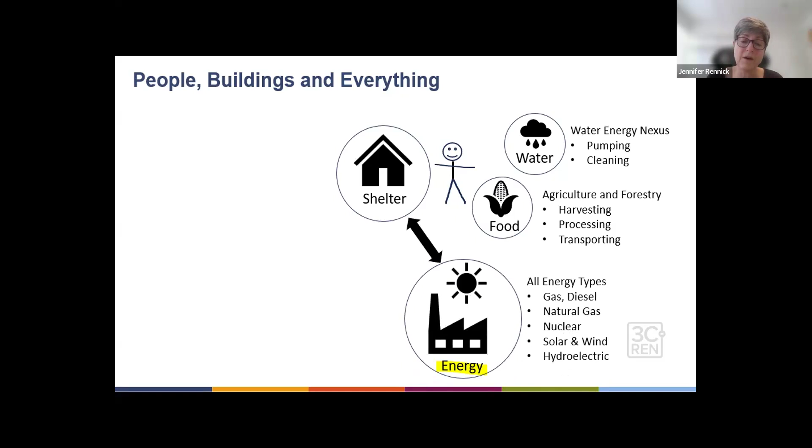And so when we talk about energy in general, you might see an icon like this that looks like a power plant, but really it could be natural gas, it could be nuclear, it could be solar and wind, hydroelectric, gas, diesel. All types of energy are a part of our environment. And it's how we power our buildings.

And then, of course, how we move ourselves and our products and how we transport all these materials is all categorized under transportation. And by shelter, really what we're going to talk about is buildings, all kinds of buildings, and their operational and embodied carbon impact.

So that includes the electricity that is used to power up those buildings, the natural gas that's perhaps burned directly for those buildings, the refrigerants that are involved in all the heat pump technology we're going to be talking about, or air conditioning, and other industrial processes that require refrigerants, and of course the building materials and the manufacturing themselves, which is part of the embodied carbon impacts.

Okay, so that kind of sets the stage, because really when it comes to our buildings, they are a piece in this giant thing we call civilization, which is, in my mind, it's like everything. And then that civilization is in the earth and in the world, which encompasses the rest of the everything.

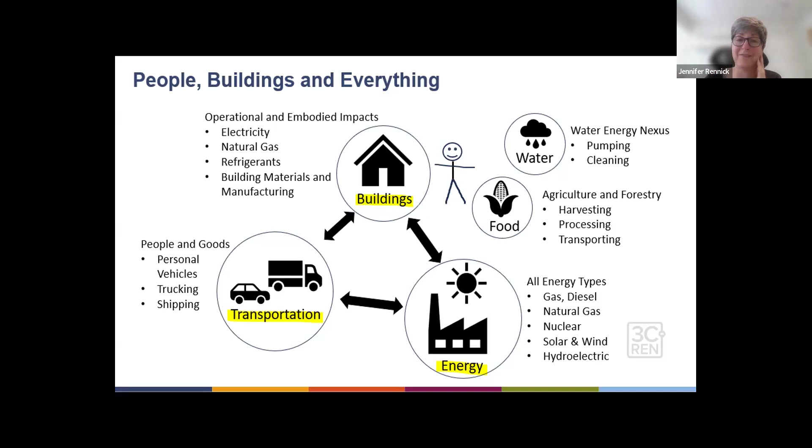Now, when it comes to tackling kind of the problem-solving process for reducing greenhouse gas emissions, first, very intelligent folks, scientists, and many policy people and government officials, they're looking at what is this problem that we're noticing where we have extreme climate weather events, climate change, global warming, an ocean that is absorbing CO2 and becoming more and more acidic.

And maybe years ago, some of you might remember in the East Coast where acid rain was really a big deal and started a lot of people thinking about this. So we identify a problem, then we have to identify causes, and it boiled down to greenhouse gas emissions, and 7 of them is kind of the main ones that we started to look at.

And then as a society, we started to identify those sources and the scope by looking at chemical processes, different economic sectors, looking at our activities, where we do those activities, and what societal groups are being impacted by them. And so as a collective group of problem solvers and policy people, we have to identify the aim. What are we going to do about this?

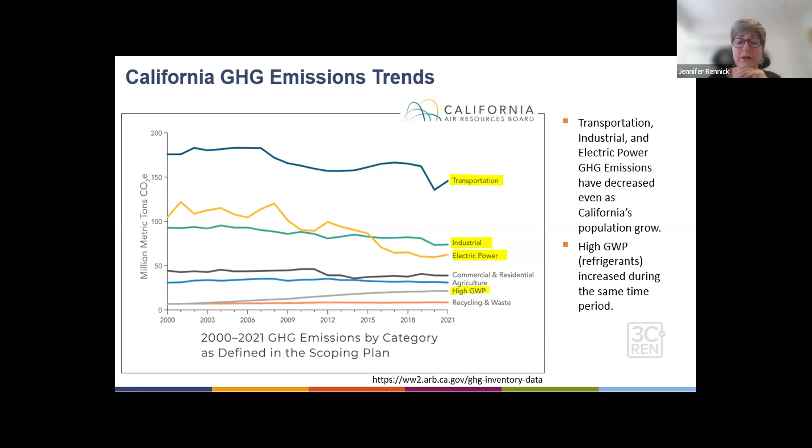High GWP, high global warming potential, often refers to refrigerants. So our refrigerant use in the state is increasing, although these other items are trending downward. Later on, when we talk about appliances and heating and cooling systems that use refrigerants, we'll specifically address what California and the rest of the country is doing on that.

Now, when we take those categories and look at subcategories, and how that's divvied out to make up the scoping plan for how we tackle greenhouse gas emissions in California, we can break them out with electricity, commercial and residential together, agriculture, that high GWP category, waste, transportation, and our industrial sector. And each of those could be subdivided further.

But when we think about architecture and architects, planners, engineers, the building and construction trade, we realize it cuts across many of these sectors. Altogether in California, our buildings and construction account for approximately 25% of California's greenhouse gas emissions. And the impact is likely much larger when we take a look at all these sectors,

because a lot of our materials are made out of state and they're imported, and that has an embodied carbon impact and a transportation impact that might not be reflected in this. So Project 2030, for example, estimates that buildings and construction account for 42% of global greenhouse gas emissions. And we also need to include the portion of electricity that then powers our buildings.

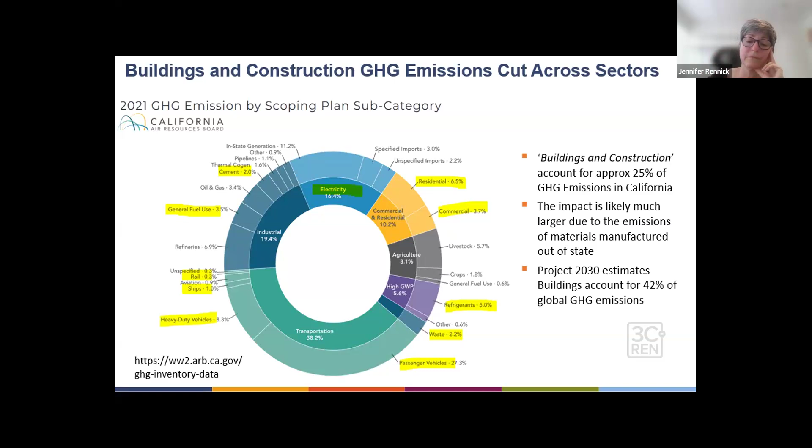Before we move on to zero net carbon design in the electric grid, I'm happy to field any questions that come along, put them in the chat, and Andy will ping me. I think the main point of what we just looked at is that buildings and construction play a role in greenhouse gas emissions, which in turn play a role in climate warming, hence California's push to educate architects on the impact of our design and how we can move towards zero net carbon design in California.

One thing we may want to clarify is that when we talk about natural gas, about 95% of what is burned within natural gas is methane directly. So there's the burning of the natural gas, the methane, but there's also the leaks that happen within the movement of the natural gas. I'm wondering if that's part of what shows up in the GWP, the leaking of methane, which is so much more impactful as a powerful greenhouse gas. Am I summarizing that correctly?

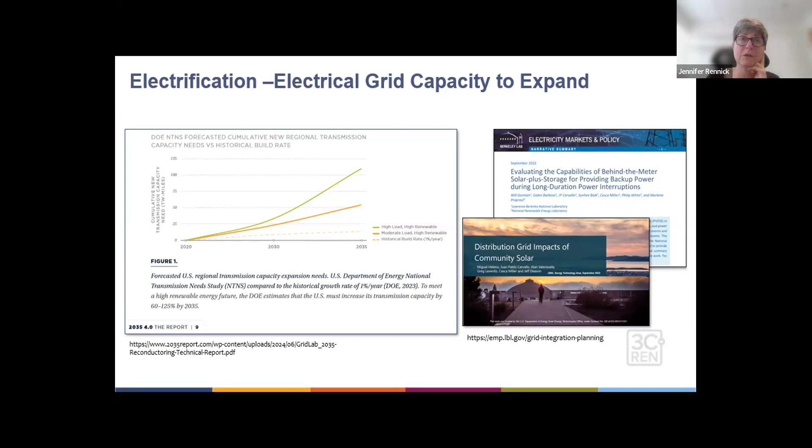What's the impact when a lot of our buildings, by energy code, Title 24, are required to have PV panels plus battery for many commercial projects - now a new 2022 energy code requirement. So yeah, the grid needs to expand.

In California, we're part of a grid system that involves the western states, a bit of Mexico, and two provinces in Canada. In California, we're looking at how California impacts this larger region, and where and how we generate this power.

There's great information on the California Energy Commission website that addresses renewable energy, combined heat and power, nuclear energy, natural gas, geothermal energy, solar energy, etc.

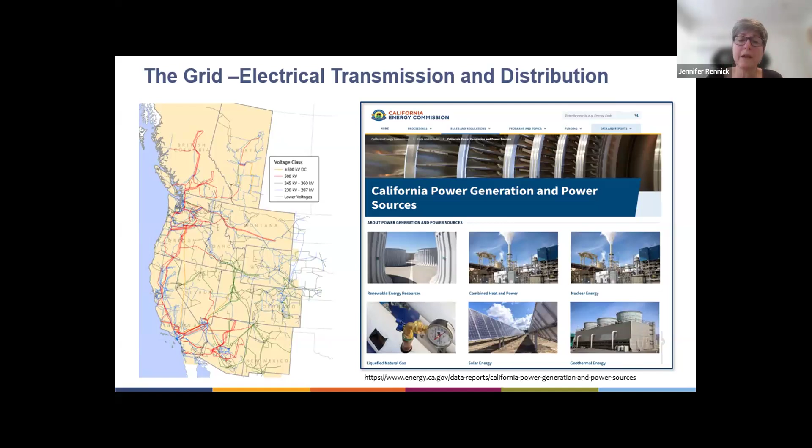In California, when we look at where our electricity comes from, quite a large portion - about a third, 31% - of California's electricity is generated from natural gas, by burning natural gas in generators.

Fortunately for California, we've done really good work on getting more and more renewables. About 69% of our electric energy now comes from non-fossil fuel sources. Our renewables that aren't hydroelectric or nuclear - wind and solar - provide about 38% of the total mix now. So that's the good news.

But there's a reason we're still burning natural gas, and why we're not 100% renewable energy yet. We'll put a pin in that - we'll come back to it in a moment.

Simultaneously, there's a lot of studies and work going on for strategies to meet the increase in energy demand and capacity without necessarily building new transmission lines. There's something called reconductoring - advanced conductors that can be used on transmission lines to increase the efficiency of electricity transmission.

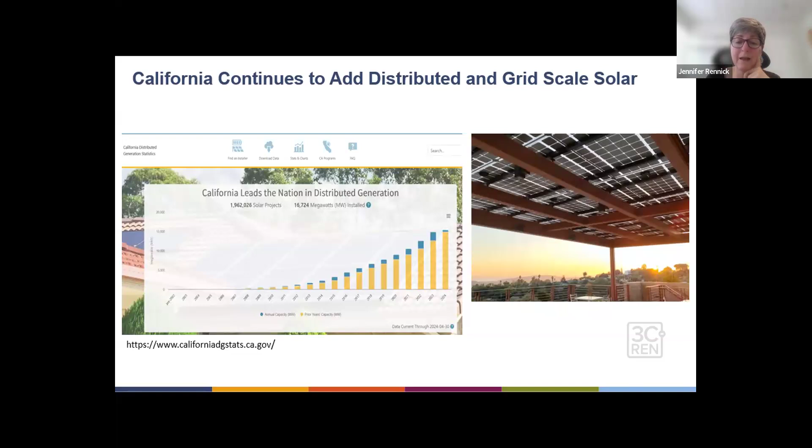The good news is that with all that solar, we're able to meet more and more of California's energy demand. But also, you might have heard people say, oh gosh, we're producing so much solar energy during the middle of the day that we can't use it all - this isn't working, and we need something else to happen.

We don't need more solar, some say. But the state of California, and a lot of folks, would disagree with that. They say yes, we need to continue building up our solar energy and renewable resources, and we're going to find ways to have energy when the sun goes down. Because essentially, when the sun's up you get lots of solar energy, and when the sun goes down, we don't have energy.

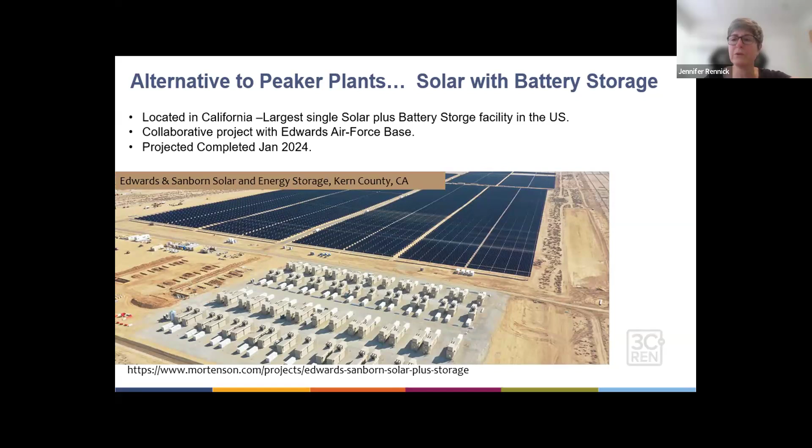And this type of project with the battery storage is what's going to reduce our reliance on the direct burning of natural gas to produce electricity. And along with that, the solar and the battery storage is expected to expand rapidly.

So if you just take a look at our clean energy resources that we had online in 2022, by the time we get up to 2045, you could see by the chart on the left that those energy resources are expected to grow substantially.

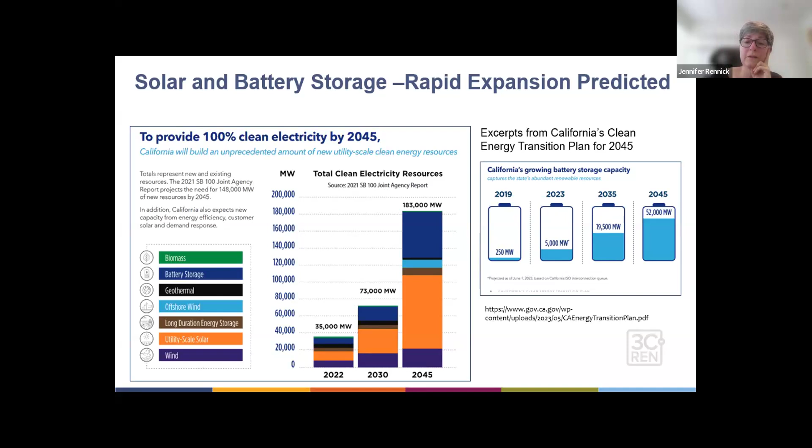And the battery itself, the graph on the right, just shows the battery part of that expansion, to isolate it and give you a visual of the huge amount of increase that we're expecting, tenfold from where we are now, taking the 2023 number, more than tenfold. This is all part of California's clean energy transition plan.

Now we'll kind of put a little pin in that part of it, and we're going to switch to the idea of hydrogen production. And why? Well, because we've got the Department of Energy working on this with their Earthshots program, and they're looking at ways to reduce greenhouse gas emissions quickly.

And one of the ways we can do this is to take that natural gas that we have, and rather than burn it, we can convert it, take the methane and convert it to hydrogen. And making hydrogen from methane can be a clean process because we're able to control that process and take the carbon and sequester it and use it in other ways, rather than just having the methane released, or burning it and having the CO2 and other pollutants be released.

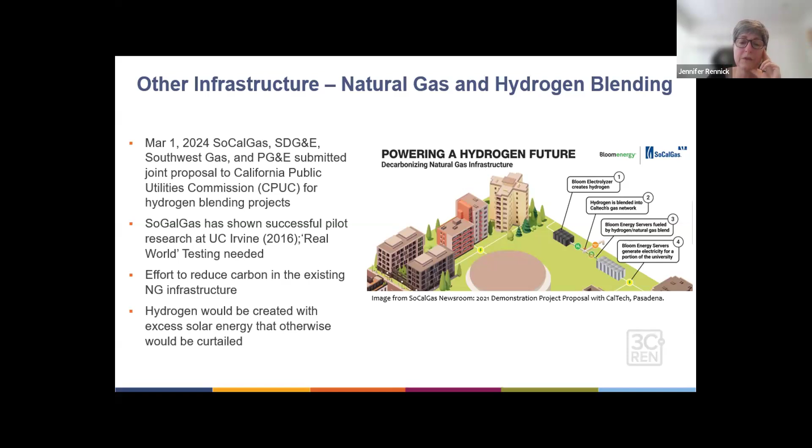Also, in case you didn't hear, this just happened a few days ago. The company Zero Emission Industries used a $3 million grant from the California Air Resources Board to build the first hydrogen fuel cell passenger ferry in the United States. It's now open, offering free rides, and holds about 84 people, so you can go up to San Francisco and see it yourself. The idea is that hydrogen fuel cells could power all types of marine vessels and trucking vehicles that need a lot more energy, safely and reliably. The same company has also created a compact, safe way of remotely refueling their vehicles and vessels, which was one of the big stumbling blocks to using hydrogen.

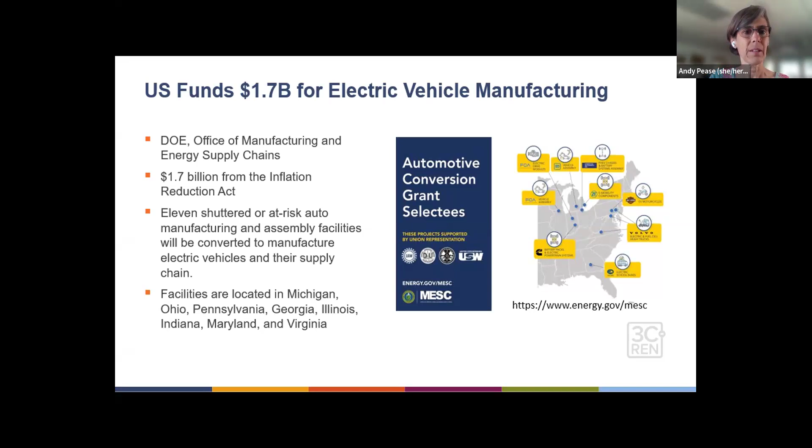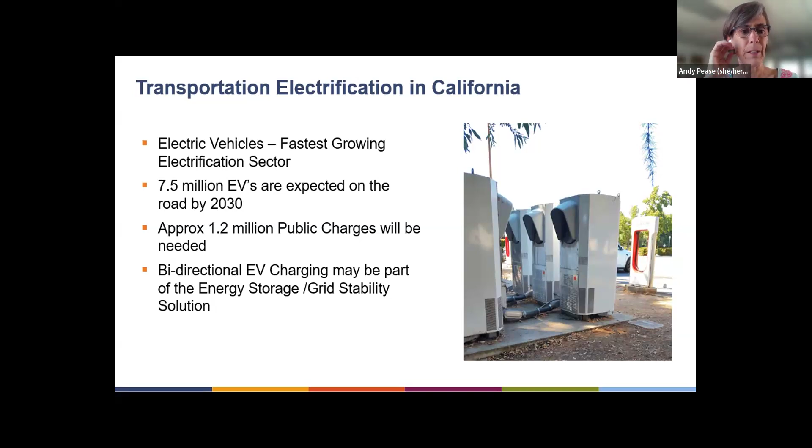And this bi-directional EV charging is going to be a significant part, right? We're all putting these big batteries in our vehicles, so could we have systems where we charge up our cars, then plug our houses into our cars when we get home, and charge the other way too? So it's part of our storage grid stability solution.

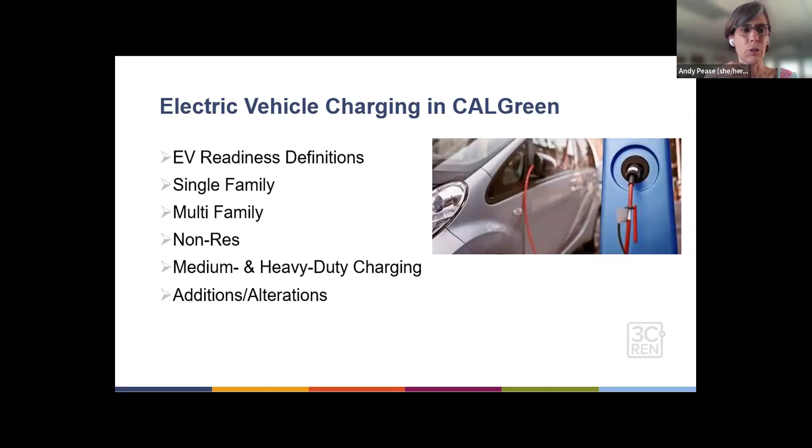So that's why vehicle charging is showing up in the California Green Building Code. We have a whole on-demand webinar that gives a lot of specificity for architects who need this. So really, we're just touching now on the foundational requirements within this sector.

So there are 3 types. There's EV capable, which is just conduit only, giving a nod to the idea that copper is expensive and valuable. We want to make it easy for EVs in the future, but we may not want people to put the wires in if they're not going to have an actual charger. Then there's EV ready, which may have the power and energy at the panel and a receptacle but may or may not have a charger, and then the actual charging station. There's a few types - what do those look like?

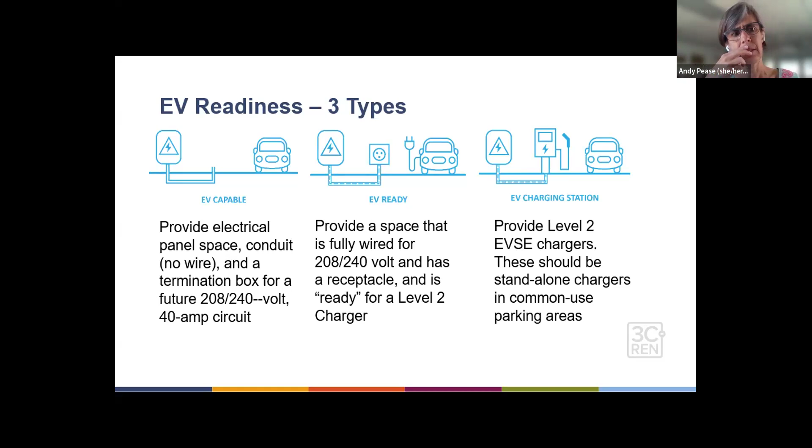Next, we end up with these level 1 trickle chargers. Those become more helpful for hybrids and overnight when you have a lot of time. But otherwise, we're starting to look at these higher amperage, 208, 240 volt options - a low amperage kind at 20 amps, or just a standard at 40 amps. And then, of course, now these direct current fast chargers, level 3.

They're not required by code, but code just had an intervening code cycle, and they only do that when things are really urgent. So that's what we're seeing now - as of July 1, there have been some updates.

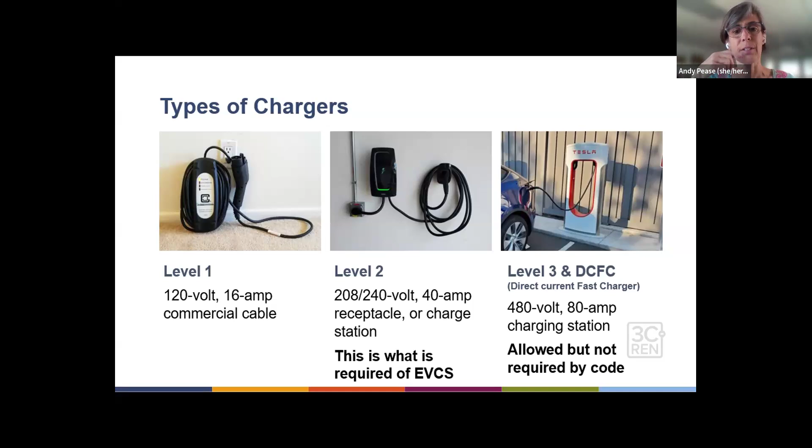So single family home is actually the lowest bar - you just have to have that EV capable. And that acknowledges that we're all over the place in terms of who has these EVs right now. We're trying to not get the cars too far ahead of the charging, or the other way around.

Oh, Andy, can I point out that at the bottom of your slides, you have that reference to the code section? Oh sure, for folks who want to read up - yeah, that's right. So this is the California Green Building Code, part 11 of Title 24. We put down the code reference if you need to look it up, or just reach out if you need the specifics.

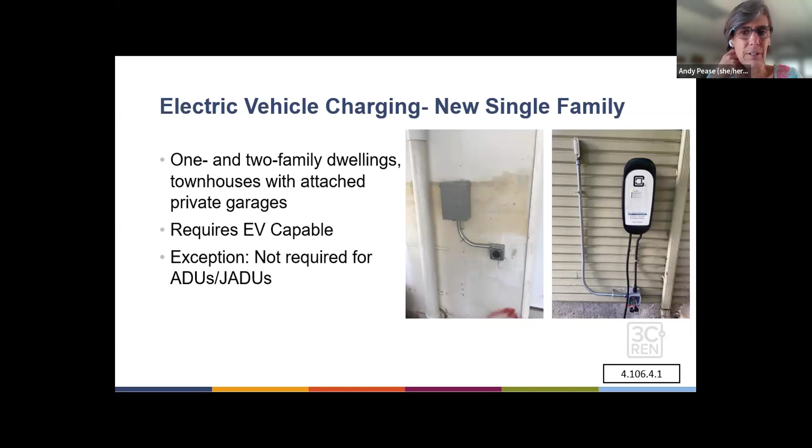So multifamily and hotels, motels - just in the 2022 code cycle, they've added requirements for charging. And then again, this intervening code cycle, it's ramping up. So last month it was one thing, and now we're requiring 50% - 40% EV have to have these EV low power ones, at least a receptacle, and then 10% EV chargers.

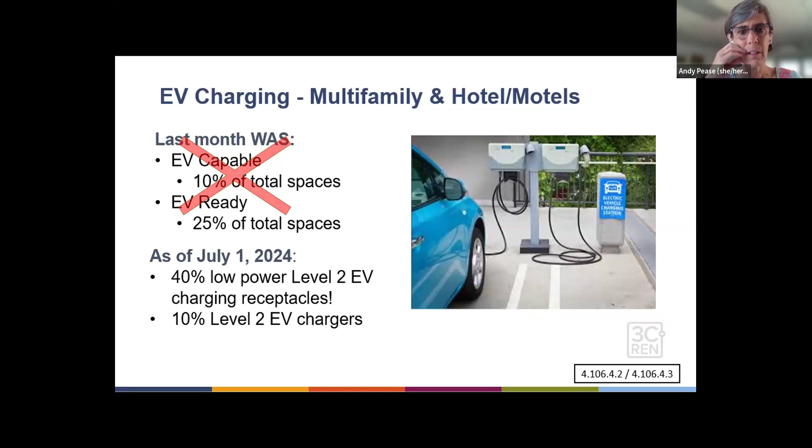In non-residential, there's a table depending on how many parking spaces you have. Again, there's a mix of EV capable and EV ready, or actual EV charging stations, and they're starting to acknowledge the range of different chargers. So they talk about having at least one level 2 charging station shall be provided, because they're starting to get into almost a performance approach.

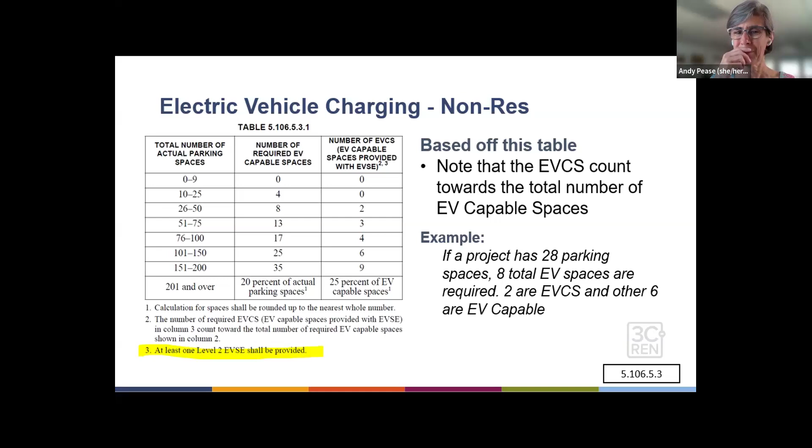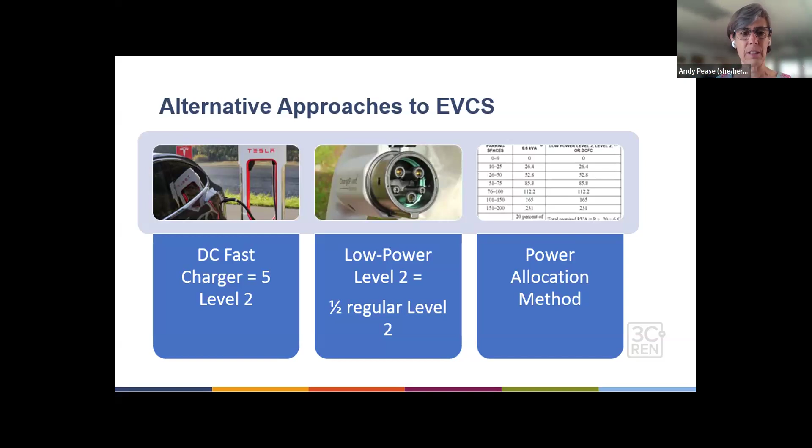Next, please. If you have DC fast chargers, then that equals - 1 fast charger is equal to 5 level 2 chargers, because people can come in for 15, 20 minutes, so you get so many more charges out of the day. You can also go the other direction - you can have low power, that 20 amp charger with just a receptacle, and that counts for half of a regular level 2. Or there's even a power allocation method based on the kilovolt amperage, and you can piece together the combination that works best. This recognizes both the urgency in incorporating this, but also how quickly the market and technology is evolving.

So in 2022, they added being ready with electrical capacity to charge medium and heavy duty vehicles. That goes back to, as Jennifer talked about, the transportation sector. And then again, this intervening code cycle, as of July 1, this requirement has been added to manufacturing and office buildings - so the urgency that comes out.

And so now we're kind of back at buildings. This is where we like to be, where our primary education and efforts have been. Hopefully what we've seen over the course of today's presentation is that big view and how buildings end up playing a central role in climate action and greenhouse gas emissions. So this is a little preview of what we're talking about for the other classes in the series.

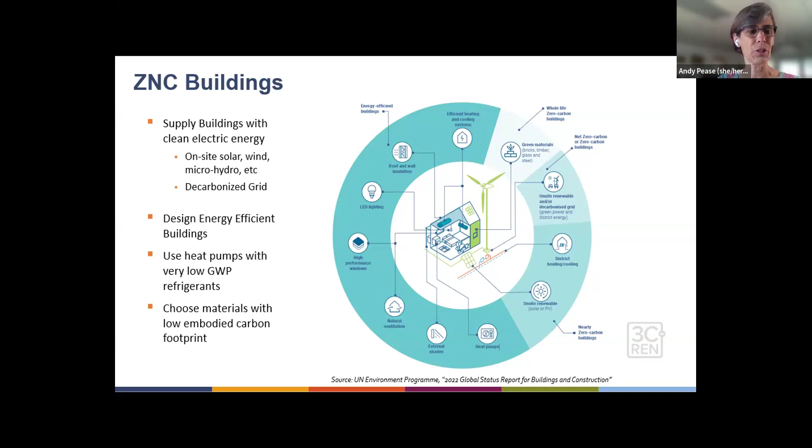In terms of what we're trying to do: supply buildings with clean electric energy. It could be on-site solar, wind, our own storage, but it can also be a decarbonized grid, depending on the density and scale of operations. First and foremost, we have to design really energy efficient buildings. Then we use electric technology like heat pumps, super efficient technology. And we try to use refrigerants with low global warming potential. Ultimately, it seemed like icing on the cake, but now we're seeing how integrated and essential it is to choose materials with low embodied carbon footprint. So all those pieces are in the center.

We thankfully have all kinds of fabulous examples of all-electric or nearly all-electric buildings. New construction is relatively easy and ends up being cost effective if you don't need to install gas or gas meters, unless it's a large scale industrial building.

In the existing building sector, we can't ignore that either. There are incremental opportunities as we're replacing appliances and getting smarter about electrical panels, to add on-site solar and batteries and electrify those buildings.

And then the other side of that, for existing buildings, not the building itself but the infrastructure approach: decarbonizing the grid, and trying to reduce the carbon footprint of natural gas systems.

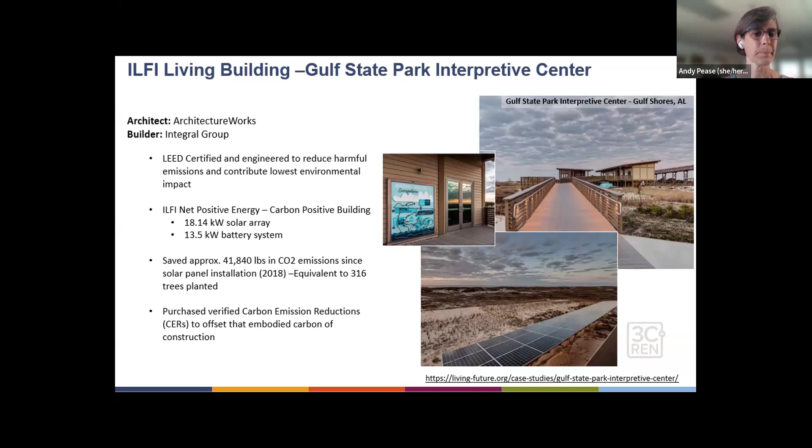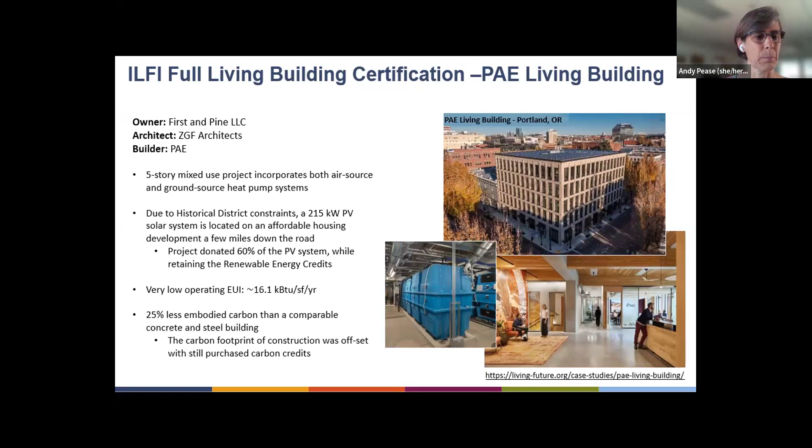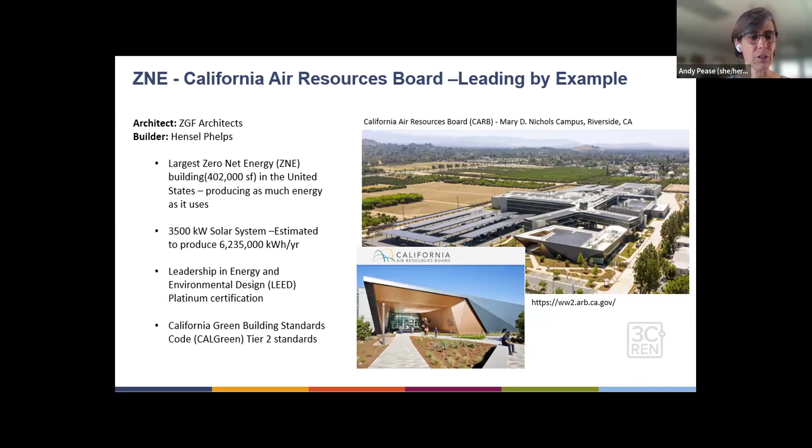Finally, the last example is the Air Resources Board leading by example—the largest zero net energy building in the United States, producing as much energy as it uses through its solar array over the course of the year, and it took advantage of CALGreen Tier 2 standards as well.

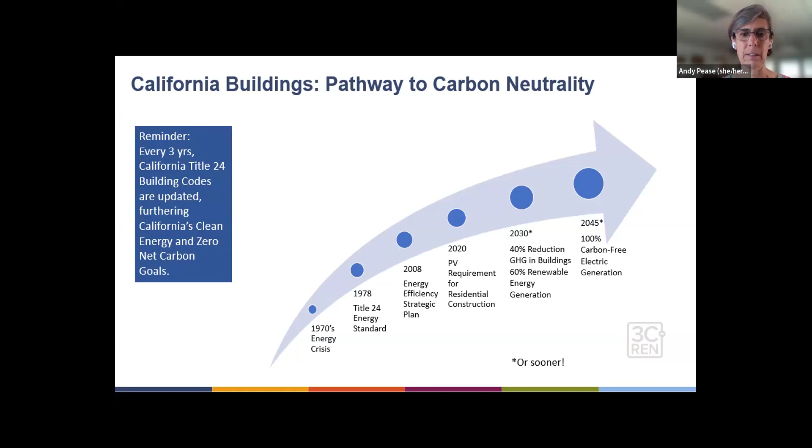So to bring it back to where we're going with this, California, through the process of identifying the problem, looking at the data, and having a multi-pronged solution, has made clear the role of buildings. It started back in the 70s with establishing the Energy Commission and the Title 24 energy standards. With every 3-year code cycle and some intervening cycles, we've continued to add efficiency, then PV requirements, and now carbon reduction is integrated into all of that.

It's an ambitious goal, but we recognize the code is well aligned with the big picture goals we need to accomplish. The heat pump technology for water and space heating and cooling, electric ready requirements to help with this transition, PV systems, and improved indoor air quality—as our buildings have gotten tighter, we need to make sure we have the ventilation requirements. Those are all part of the big picture goals of the Energy Commission.

And it's exciting, right? This is the good stuff—we're in an industry that can really make a big impact for California's climate action plan. We've got this roadmap about vehicles and greenhouse gas emissions, and it ties into creating green jobs. There's an equity component in how we do this, and it's going to make for a healthier California and a healthier planet overall. What we do matters. This isn't tree hugger fringe stuff anymore—it's just how we build, and it's an exciting time to be part of this industry and part of the solution.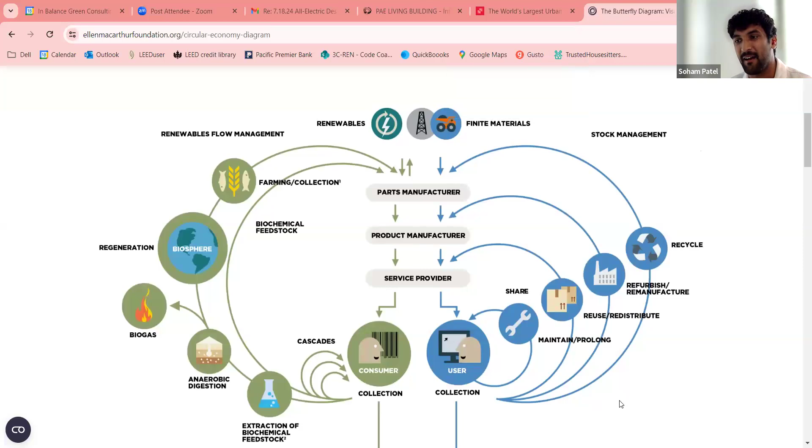Yeah, there will always be some, on the right-hand side, extraction of finite materials. So how can we minimize the extraction of finite materials and keep it in the supply chain, and prioritize the use of renewable materials and keeping them in the supply chain? I think that's really shifted my perspective on this lithium conversation, because as we make more batteries, and if the idea is that every home has a battery, that's a lot of lithium to have to figure out, you know?

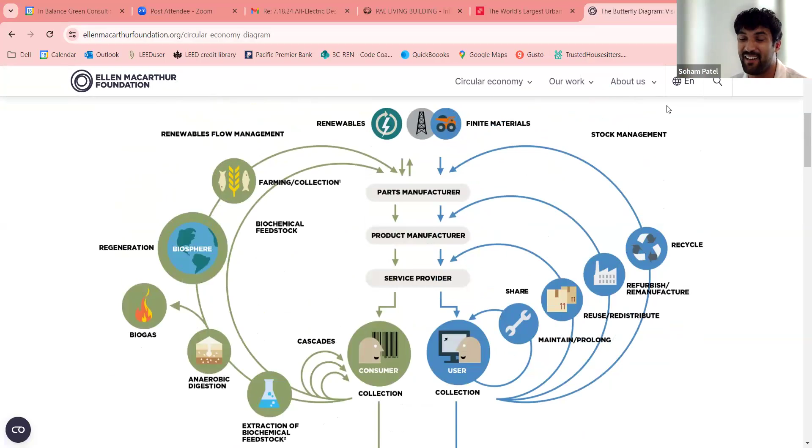Right. And so there's also now saline battery chemistries. For a lot of residences and buildings, you don't necessarily need a high density battery like a lithium battery that you would want for a vehicle, for example. That's something too that our clients weren't aware of. They're like, oh, you mean lithium ion chemistries are not the only battery out there? And that's true. So yeah, I think it would be great to hear more about this in a future topic, especially given the comments from me and from George, I believe Melissa. I think that would be interesting to know how it applies to a building, not just at the macro scale.